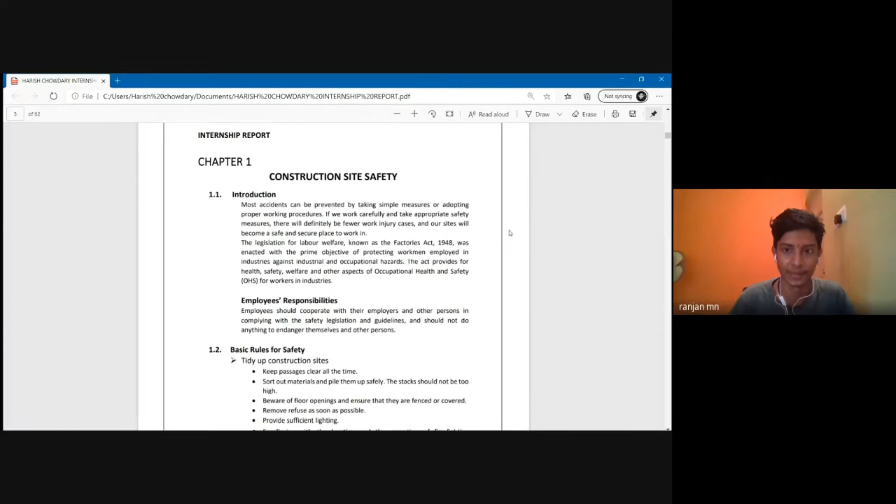Hello? Yeah, Harish, fine. The basic rules of safety, as we all know, are keeping the passages clean - maintaining cleanliness is next to godliness. We need to maintain a clean atmosphere where we work, whether it's poisonous gas emission from industry or anything of that sort, or wearing precautionary safety helmets. These safety measures are to be taken compulsorily.

Moving on to safety measures before operating a machine: ensure that the dangerous part of the machine has been installed with a guard. This is very necessary because we'll be working with hazardous material like drilling machines. Pointy equipment has to be safeguarded with caps.

For example, the reinforcement at the bottom of the foundation will be left open. So we'll have to make sure a cap is installed, because if the employee working there falls on it, it may be life-threatening for him. We'll have to make sure safety precautionary caps are installed on pointy equipment or anything of that sort.

Harish, next please. So what about personal safety? I just talked about the safety measures for the equipment we're using. Equipment aside, we'll have to make sure we ourselves are safe first. So what safety equipment do we need to make sure we're using is the first thing that comes to picture.

Wearing protective equipment - the PPE, that is the protective kit we're using - it may be gloves or helmet, anything of that sort. Shoes are mandatory because we'll be working with heavyweight materials and pointy equipment also. Shoes and helmets are compulsory items we must be equipped with.

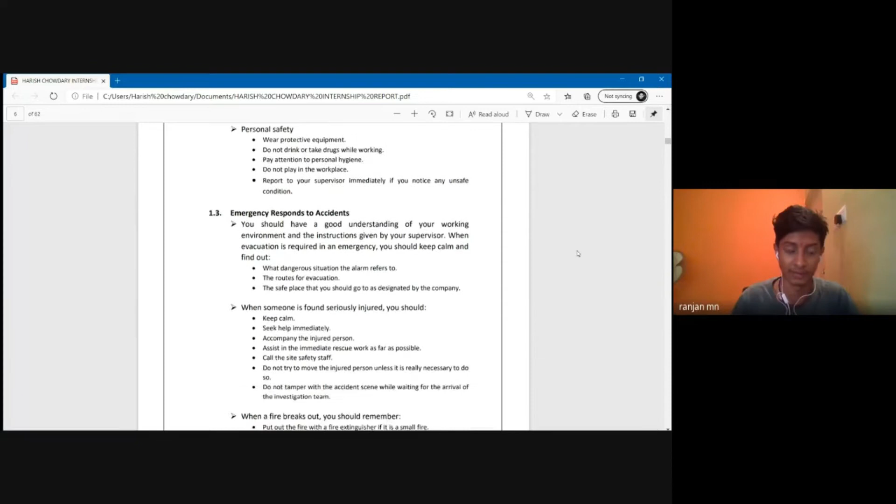Yeah, Harish. These are some of the tips for workplace safety.

Coming on to falsework, we'll have to make sure that during false work, there are many hazardous conditions happening. We'll have to check whether the false work is erected according to the design. Make sure that the false work is securely erected. If it's not securely erected, it may cause danger to us also.

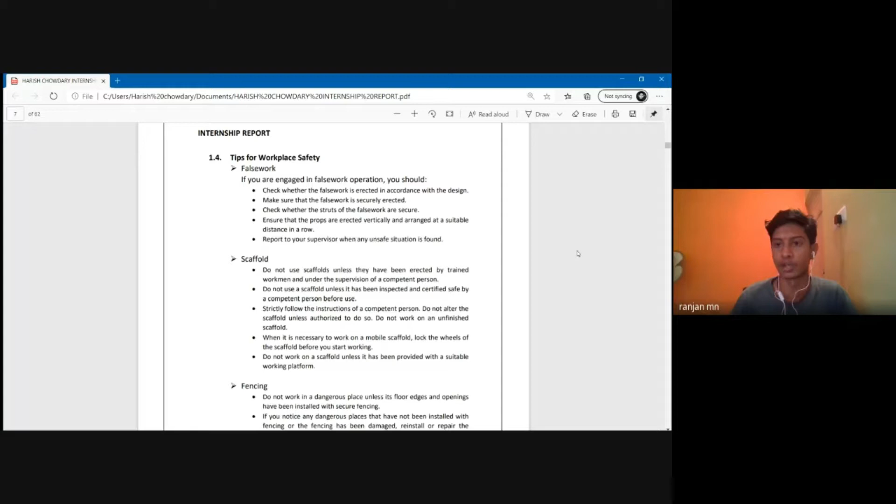Coming on to scaffolding works, we know that there are many types of scaffolding. There is automatic scaffolding also with wheels. We have to make sure that scaffolding is fixed by an engineer who has sufficient experience in scaffolding formation. If the scaffolding is not fixed appropriately or the joints are loose, the person working on the scaffolding may risk his life. And if the wheels are not locked during the scaffolding, it may slip and cause various damages to the worker also.

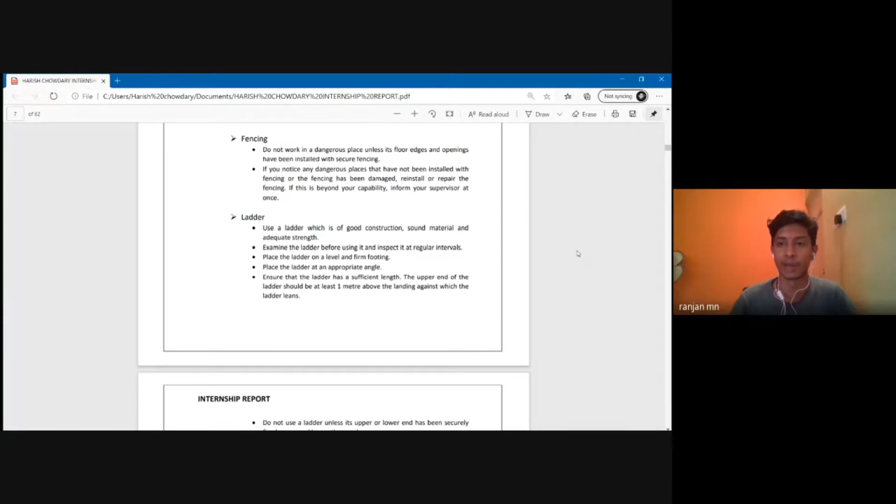Fencing and laddering, as we all know, dangerous places like floor edges or openings should be installed with secure fencing. We need to make sure that fencing is proper and the foundation of the ladder should be secure so that it does not slip or any negative activity happens over there.

As I said, this is same as workplace safety and fire protection. Excavation: during the excavation work, we'll have to make sure that the excavated earth material is moved at least 1 meter or 1.5 meters apart from the excavated place. If any excavation material is left on the edges itself, there is more possibility that the excavated earth material falls back again into the excavated place. So it's completely a waste of the work we have done if the excavated material falls down into the pit that we have excavated.

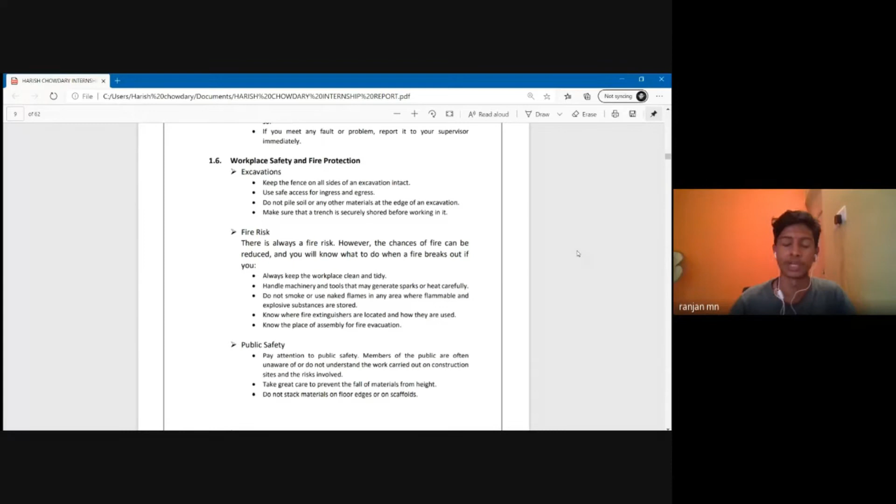Regarding the fire risk, I always say it should be clean and tidy, since fire can occur due to the fuels that we have stored and due to equipment also. We'll have to make sure that the equipment is stored in a dry and clean place so that no fire accidents may occur.

Waste disposal is the major concern we are facing these days. It may be construction waste, demolition waste, or anything for that matter. Waste disposal is causing a lot of negative activity on the atmosphere as well. The waste left as such, like construction or demolition dust waste, may get into the atmosphere and cause various respiratory problems also. So we need to make sure that this waste is disposed of properly, in a specific place far away from the city. Or if there is any chance we can use this disposed material, such as aggregates or anything for that matter, for other construction purposes, recycling of this material can also be done. So waste disposal plays a very important role in this.

As I said, personal safety hygiene, that's PPE, personal protective equipment. This is a hot trending topic these days after the corona outbreak. Especially all of you would have heard what PPE actually is. It's personal protective equipment, just to protect ourselves.

You are observing in this corona situation what's happening, they're completely covering their body. The reason for completely covering their body, especially their nose and mouth, is that there are more chances of the virus spreading through the nose and mouth. Taking that same example in the construction field also, we are getting more affected through our hands, our head, or also through our ears. So for that matter, we'll have to make sure we are completely equipped with safety equipment so that we are safe.

Eye protection is one of the major causes. While you are working on electrical conduits or anything for that matter, while soldering, we'll have to make sure our eyes are completely protected. We'll have to make sure we wear safety glasses for that work.

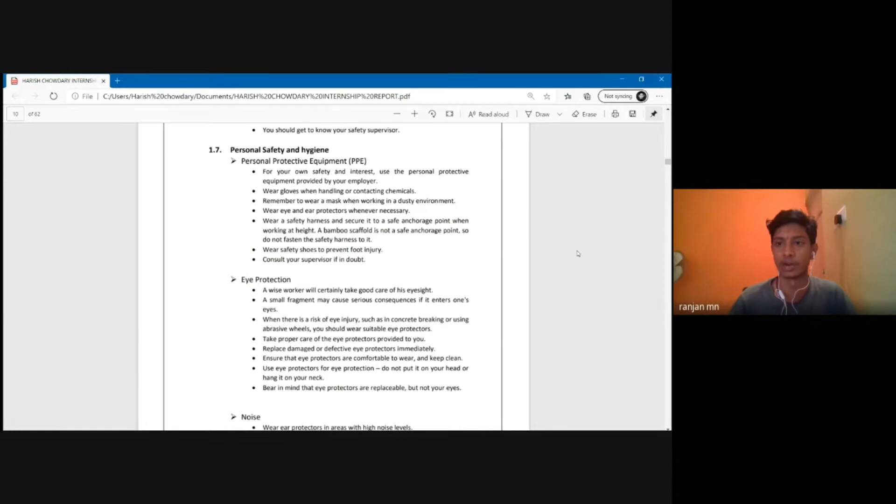For noise, especially during drilling works, excavation works, and cutting and drilling works, the noise is very much there. There are chances our ears get damaged, and we need to make sure our ears are protected. We need to use ear protectors.

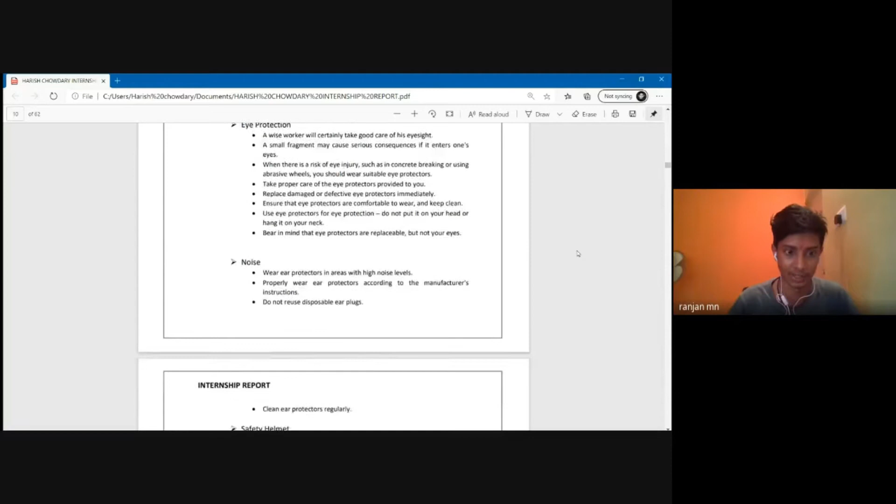Alcohol and first aid. First aid, as I said, they will have to maintain everything at the site. If any employee undergoes a sudden unexpected accident, we'll have to make sure the first aid kit is there under the supervision of the engineer.

Manual handling of the operation should be avoided, because manually there are many chances that humans make errors. So we should reduce the manual handling of operations.

Alcohol and drugs is one of the major concerns that we are facing these days. If an employee is consuming alcohol and drugs and comes to work, he'll not be aware of what he's doing or what activities he's carrying out. So we'll have to make sure that alcohol and drug use is reduced.

Personal hygiene, I don't think I'll have to talk about it much, because as engineers we'll have to make sure that we are clean, our dress is tidy, and the shoes are a must.

Yeah, from here Harish will continue.

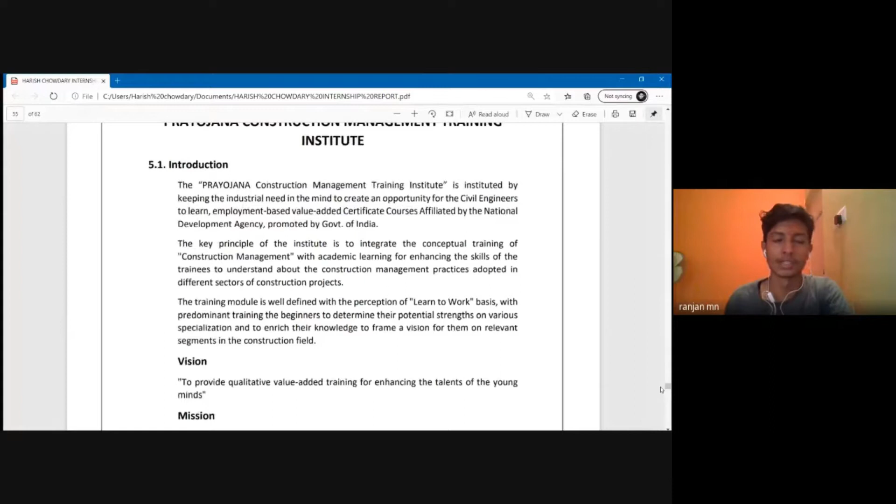As I said earlier, the introduction and mission of Prayojana was already stated previously. The vision of Prayojana Institute was to provide qualitative, value-added training for enhancing the talents of young minds. The mission was to enrich the learning modalities, that is, to bridge the gap between industry and students.

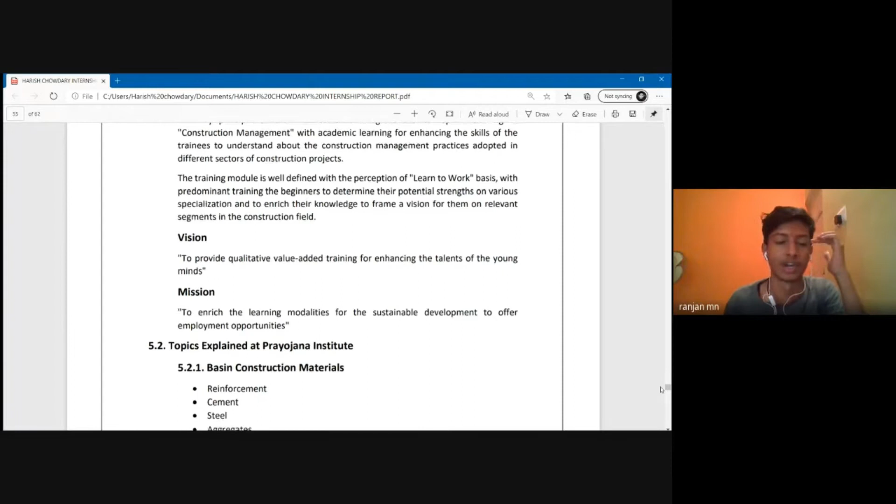What we are facing is that the academic things we learn are not at all sufficient for the industry. That was the first thing I realized.

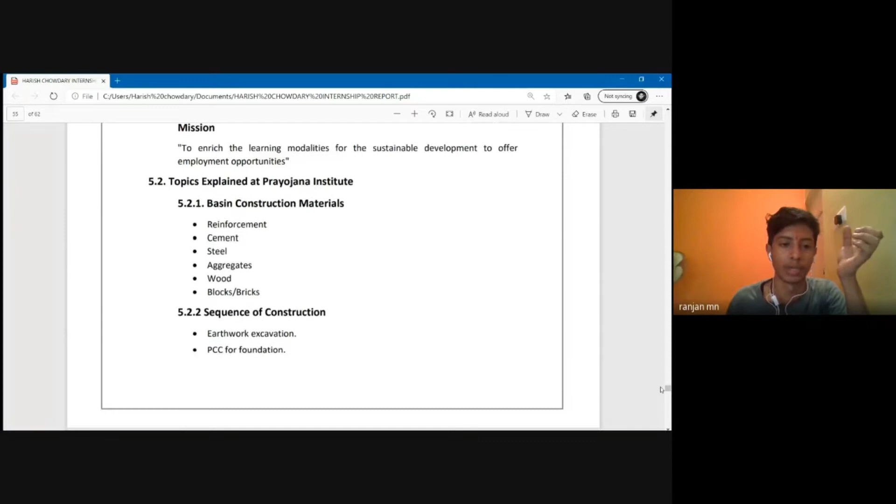Moving on to the next part, the topics explained at Prayojana Institute were basic construction materials. These are very basic components used in construction: reinforcement, cement, steel, aggregates, wood, and blocks or bricks. You all know this, so I don't need to explain it again.

The sequence of construction is very much important. Earthwork excavation - prior to this, we undergo surveying of the work. We fix different levels, using total station or auto level, or anything for that matter. We fix the levels first.

We need to level the land as per our plan, so what excavation and what filling work has to be done is calculated first. That is earthwork excavation.

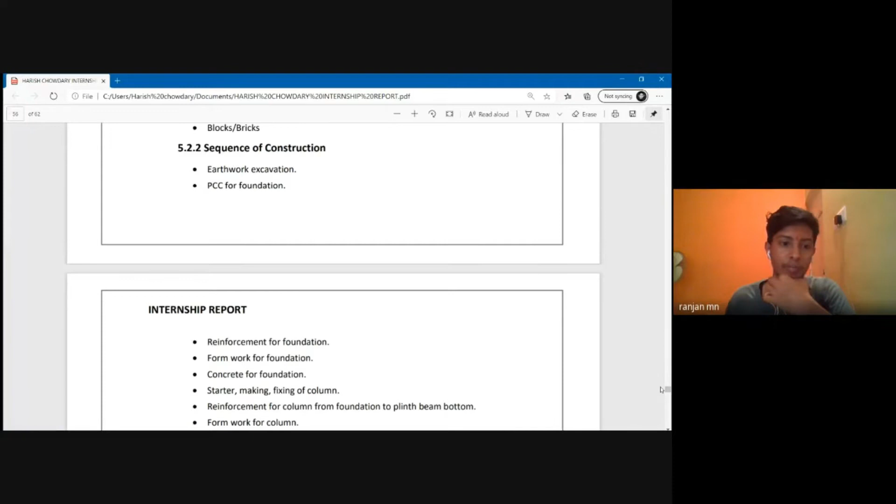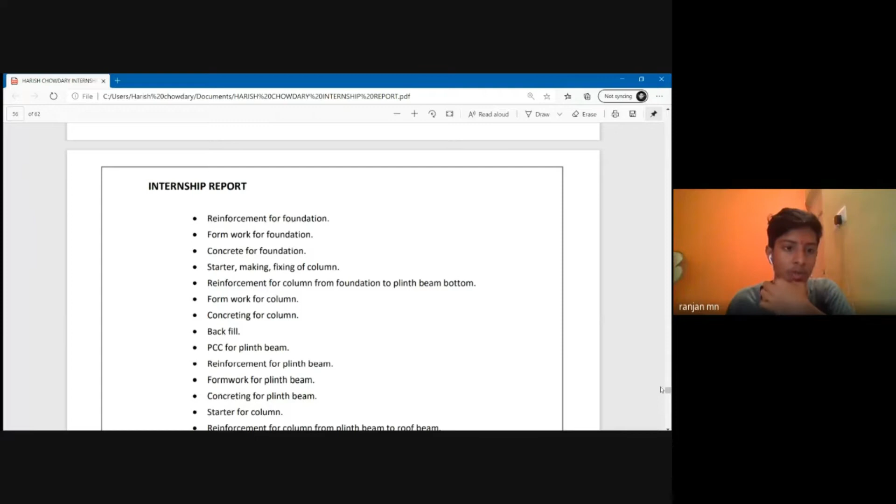PCC for the foundation has to be laid so water penetration can be checked. Reinforcement for the foundation, formwork for the foundation, concrete work for the foundation, starter making, fixing of the column, reinforcement of column, foundation, plinth beam bottom, formwork for the column, concreting of the column, backfill - these are the various activities carried out in a construction project. This was previously explained by Nikhil, so I'll move further.

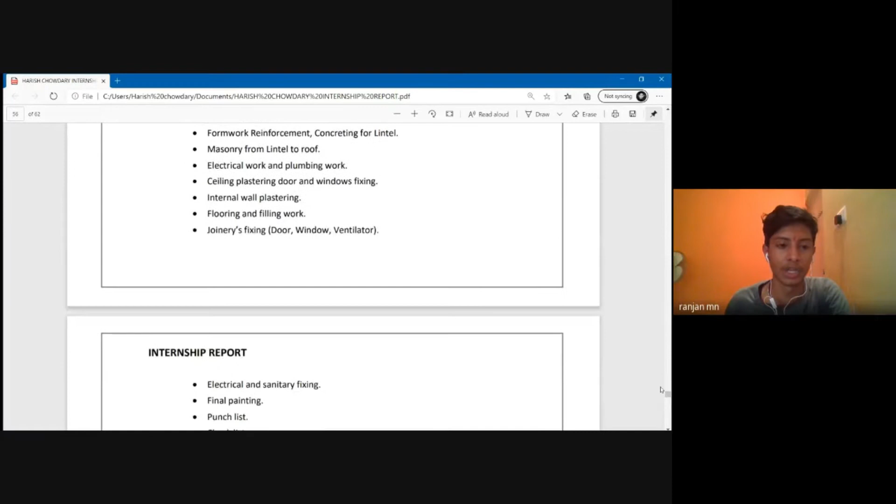As you can see these days, building collapses are happening frequently in Bangalore. Recently, beside the Kapali Theatre, two buildings also collapsed. The reason behind this is still being investigated - they are still searching for the reason, but I think the quality of materials or the execution of the work may not have been up to the mark.

So the test on aggregate - as we all know, there are two types: coarse aggregate and fine aggregate. What are the tests we do on coarse aggregate? These are very basic concepts like impact test, flakiness test, specific gravity, and sieve analysis. And for fine aggregate also, we test for sieve analysis, specific gravity, and silt test.

So, test on steel. The reason why we use steel in concrete is well known to all - concrete is very strong in compression, whereas steel is very strong in tension. To balance this, we go for reinforced concrete, where steel and concrete are used together.

So what are the main components of steel testing? What are the tests we do? There's the tensile test, impact test, compression test, and bending test. So what are the tests on cement?

Cement plays a very major role in compression. Consistency of the cement may be for the matter of color or anything else. The initial setting time of the cement may be up to 30 minutes, the final setting time up to 10 hours, and there's also the specific gravity of the cement.

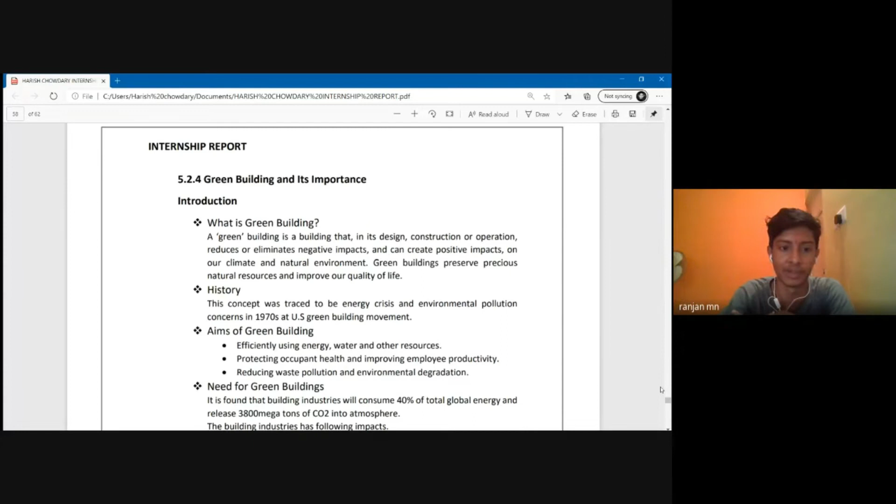Coming to green building, normal construction buildings using normal aggregates and normal cement consume 40% of total global energy, and release 3,800 megatons of carbon dioxide into the atmosphere. As I said, the building breathes. Once we go with concrete, the building also breathes and releases carbon dioxide into the atmosphere. Just imagine, 40% of global energy is being consumed, whether electrical energy or material energy used in processing, for anything for that matter. But 3,800 megatons of carbon dioxide being released into the atmosphere is simply not acceptable, I think.

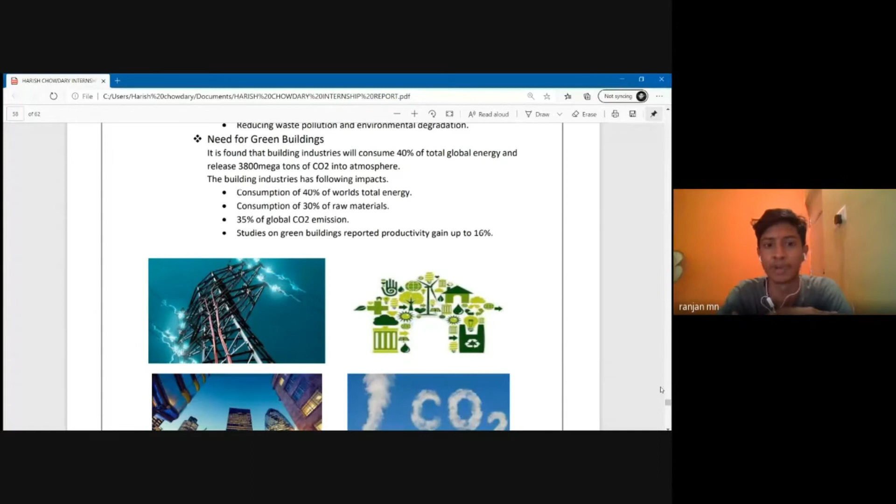So the building industry has the following impacts. Normal buildings consume 40% of the world's total energy and 30% of raw materials. As you know, in buildings we use natural materials only - coarse aggregate from stone and rocks, fine aggregate from sand beds, and cement, which undergoes many chemical reactions and processes in its production.

So 30% of the world's total raw materials is used in the construction field only. 35% of global carbon dioxide emissions are due to the construction industry, whether from equipment like cranes or other things, and due to the high use of cement.

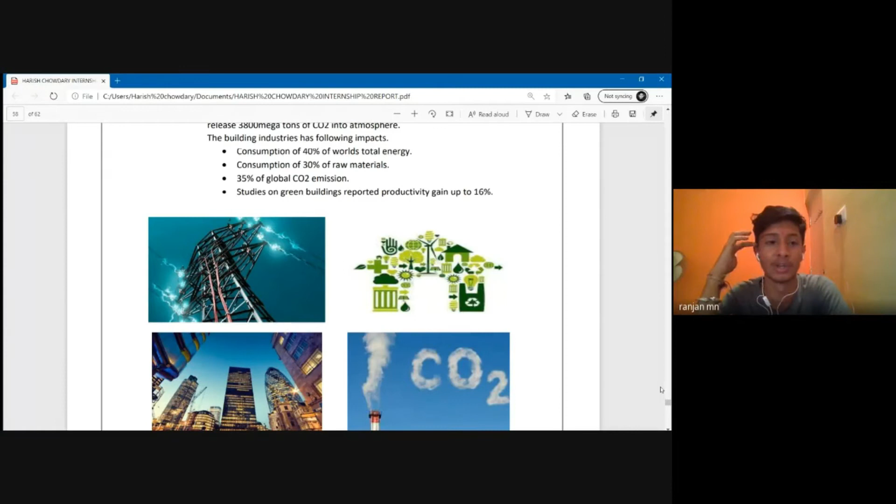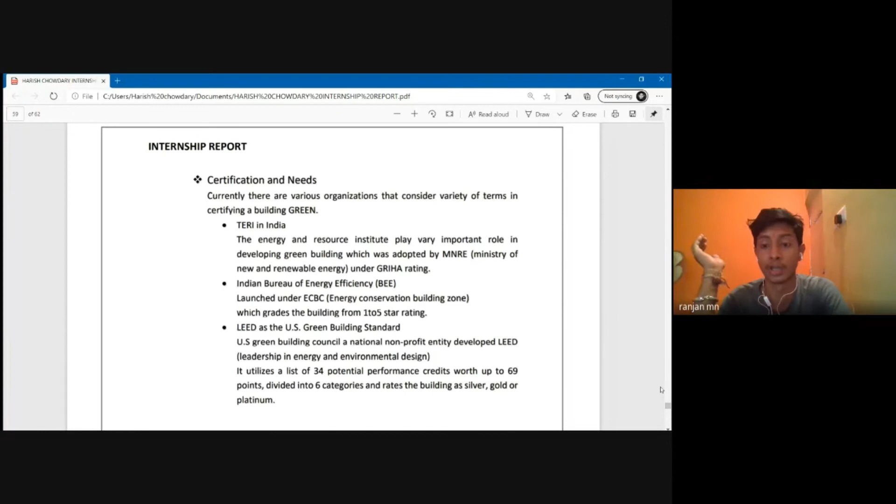So what certification do we need for green building? Just imagine you are the customer, thinking 'yeah, this is my green building.' You go to some normal client and a normal mason builds your building, and while certifying it you just say 'yeah, this is my green building' - that cannot be accepted by the company. So what terms and conditions we need for green building is the major concern.

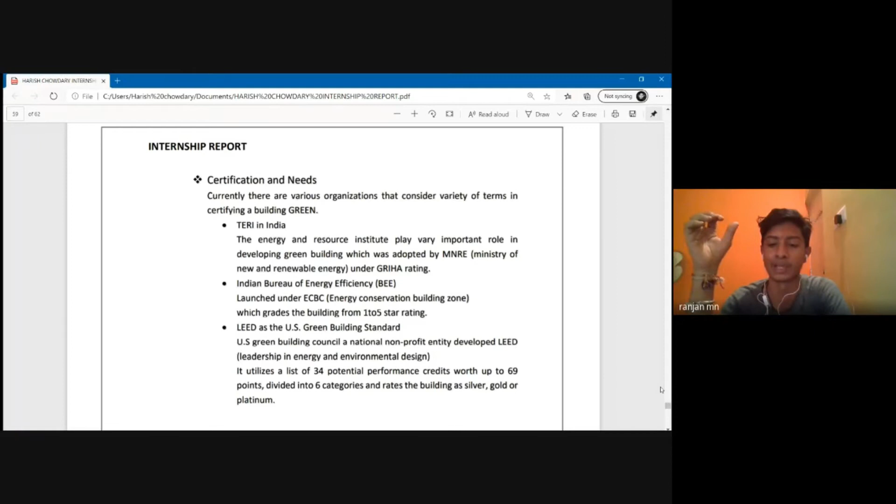TERI India under the Ministry of New and Renewable Energy Resources gives the GRIHA rating certification to green buildings. There's also BEE, the Bureau of Energy Efficiency - most of you would have observed 5-star ratings on electrical appliances like fridges or ACs. The first thing you ask is the rating, because equipment with 5-star ratings has less energy consumption.

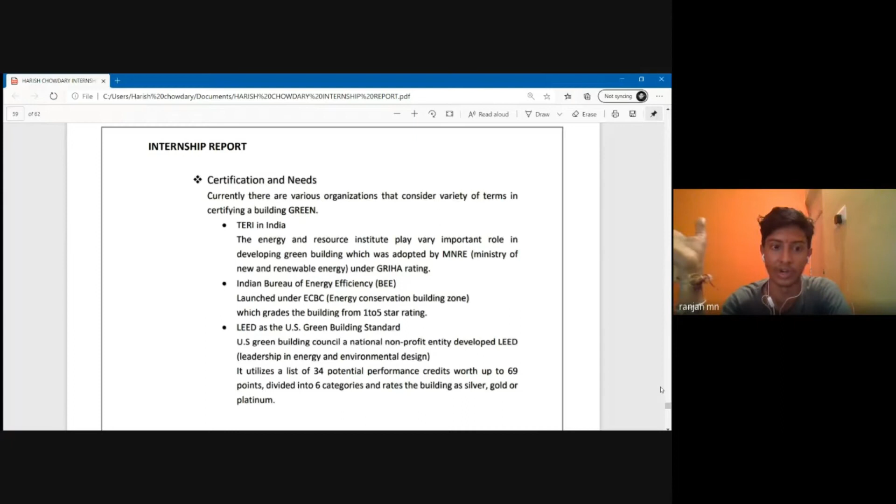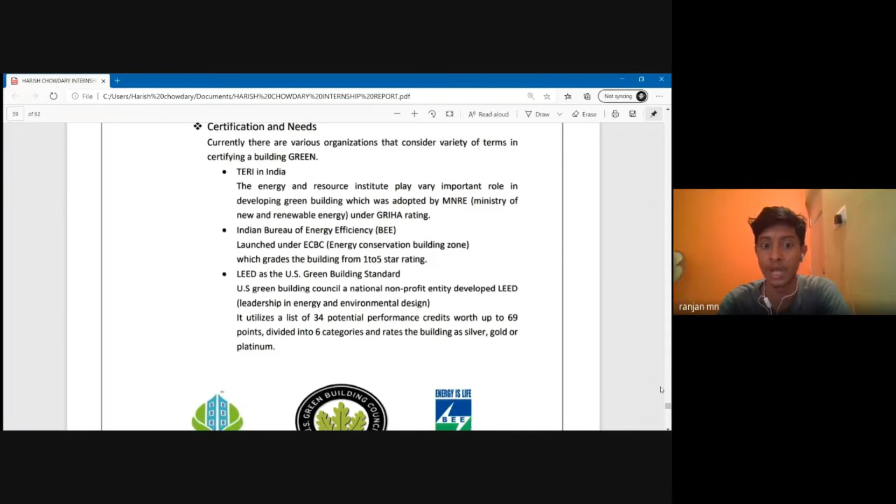LEED stands for Leadership in Energy and Environmental Design. As the name suggests, it should be less energy consumable, and the design should be environmental and eco-friendly. This is the US Green Building Standard. It utilizes 69 points divided into 6 major categories, and ratings given for a building may be silver, gold, platinum, or similar. There are 6 categories majorly considered by the Green Building Council.

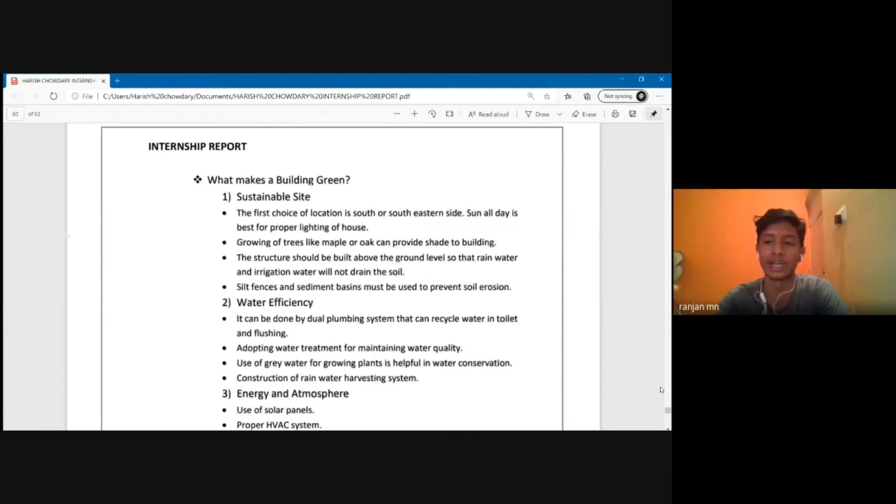Going on to the 6 major criteria that IGBC looks for to rate your building: the first is sustainable sites. The selection of site, the direction of site, or the construction orientation plays a very important role. South or southeastern side of the construction site is preferred because sunlight throughout the day provides much higher light in the building, and energy consumption is reduced.

You can go with solar panels or similar measures for that matter. Energy consumption is much less when you take a sustainable site, and the site should be above ground level. If it's below ground level, we do filling activities to raise it above ground level, ensuring drain water doesn't enter the building - because if drain water enters the building, you know the ill effects that happen.

It may lead to health issues, even degradation of the quality of the building. There are many issues that can happen, so the selection of the site is very important. Out of 6 criteria, this is the first one: the sustainable site.

Water efficiency, whether grey water or black water, is very much required. We cannot simply let water waste go into the drains. So what is water efficiency?

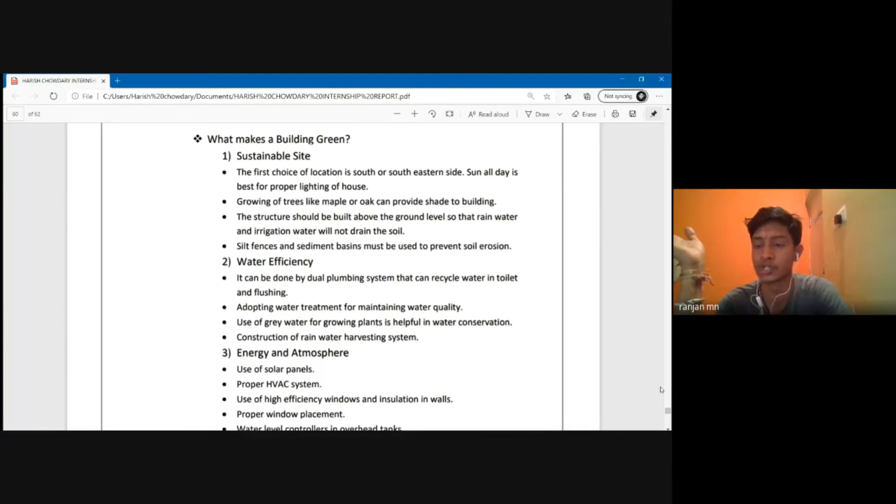Dual plumbing system is very much trending. As you all know, in Bangalore it has been made mandatory that every construction activity should adopt a dual plumbing system, along with water treatment for maintaining water quality.

A water treatment plant should be there so that the drinking water you are having is of better quality. You will need water treatment quality, and water recycling plants are also suggested so you can recycle the water. Water efficiency plays a very important role in this.

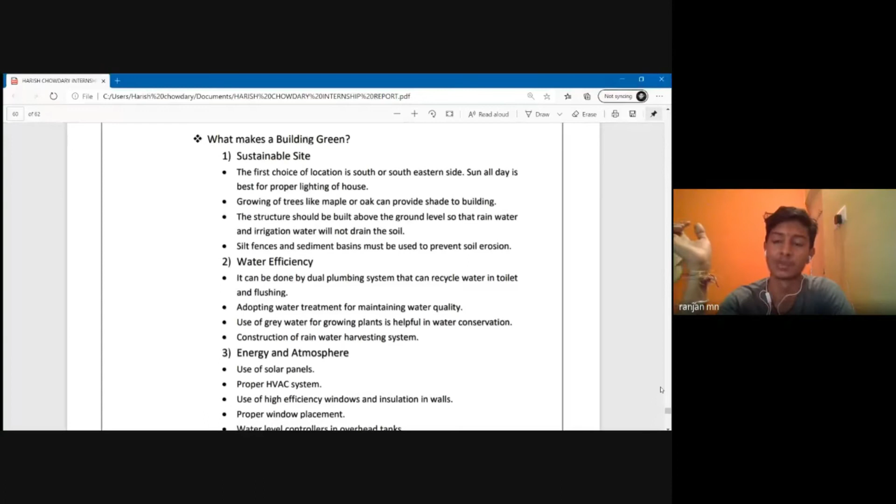Construction of rainwater harvesting systems is also important. There are many sorts of rainwater harvesting systems you can go for. Even a simple rainwater system is seen in villages these days, showing the need for saving water. This is the second point the IGBC considers out of the 6 points while giving you the rating.

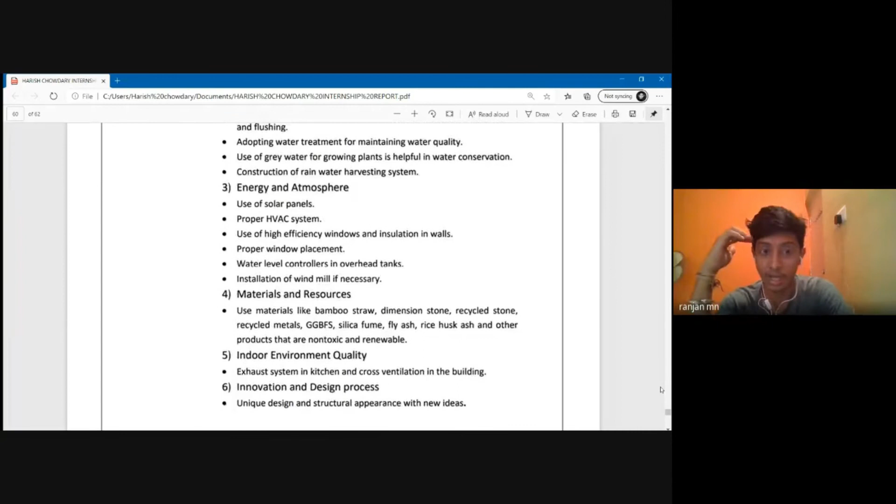Energy and atmosphere. Coming to energy consumption, in manual construction we are not going for solar water heaters; everyone is going for geysers or something. The proper HVAC ventilation is not being done properly, and this leads to various energy consumption on a large scale.

So what happens in green building is solar panels will be used, a proper HVAC system will be used, and high efficiency windows, meaning large windows can be preferred, because large windows mean large air and large light will be getting in, and we can utilize it 100%. So these are the energy and atmosphere criteria.

Material and resources. As I said, with conventional materials like cement, if you are going 100% cement, we know carbon dioxide emission is much more. If you are going 100% normal aggregates, we are consuming more energy.

What's happening in material and resources these days is instead of steel, we are even going for bamboo reinforcement, not completely but partially bamboo can also be replaced. We can use many materials like fly ash, rice husk ash, GGBFS, that is ground granulated blast furnace slag, as a substitute in place of cement.

Not completely, but if we are substituting at least 2 to 3% of these materials instead of 100% cement, we are reducing energy consumption to a great extent when it moves to a higher scale. So material and resources plays a very important role.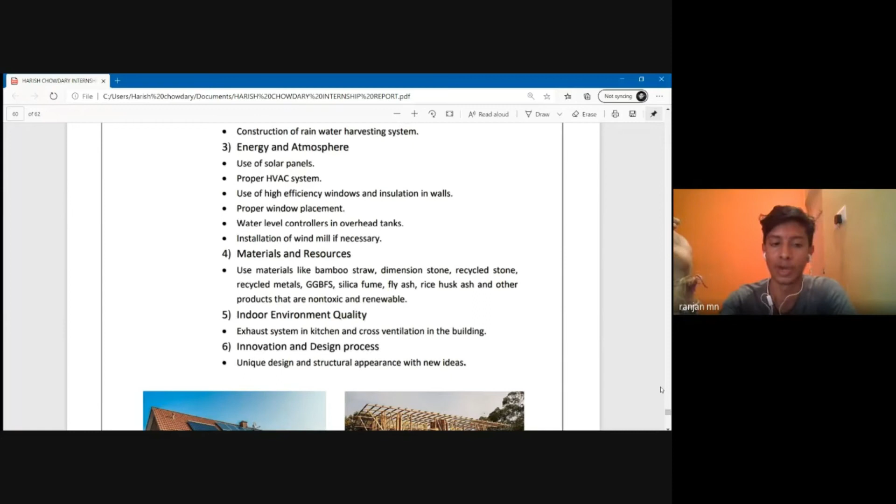Indoor environmental quality, as I said, involves the exhaust system in the kitchen and cross ventilation in the building. They mention the kitchen because it's the place of high risk for fire accidents, or smoke, which happens mainly in the kitchen. So the exhaust system in the kitchen must be very good.

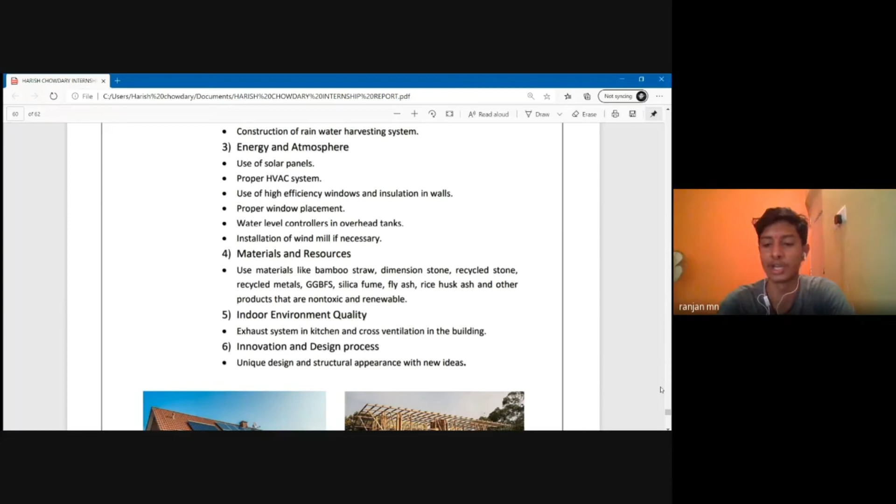Innovation in design. Green building also gives preference to innovation in design; the design should be pleasing in appearance, and they consider that too. These are the major 6 criteria that IGBC considers to rate your building from normal to platinum, as I said earlier, so make sure these 6 criteria are met.

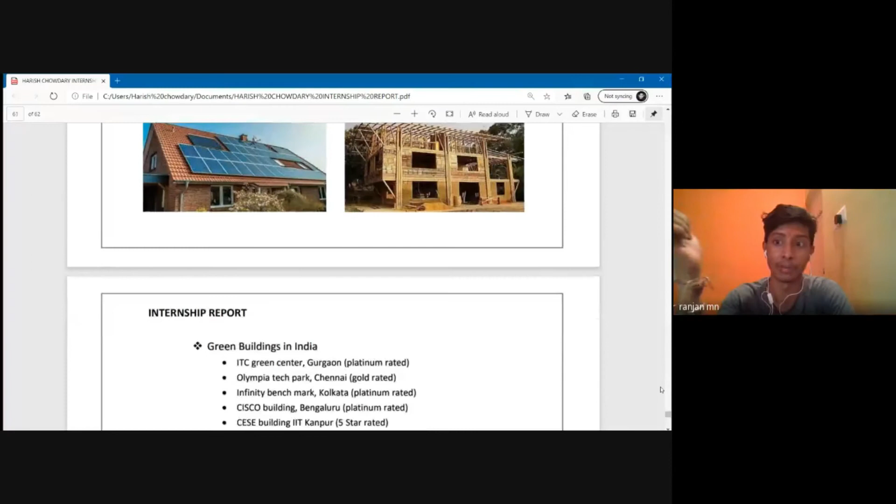During site construction, if you find any rock on the site, don't dispose of it or throw it away. You have to make sure that rock is used for some decorative purpose. If you use it decoratively, IGBC considers that you're not degrading natural resources and are utilizing them properly.

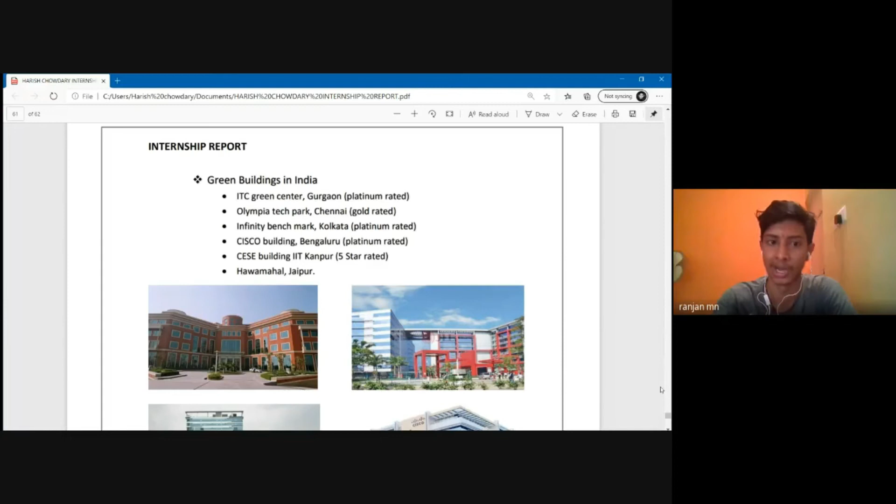So these are some of the green buildings that are in India currently, such as the ITC Green Center in Gurgaon, which is platinum rated. You can see in brackets what ratings have been given by the IGBC to these buildings.

Olympia Tech Park in Chennai, Infinity Benchmark Kolkata, Cisco building, CESE building, Hawa Mahal in Jaipur.

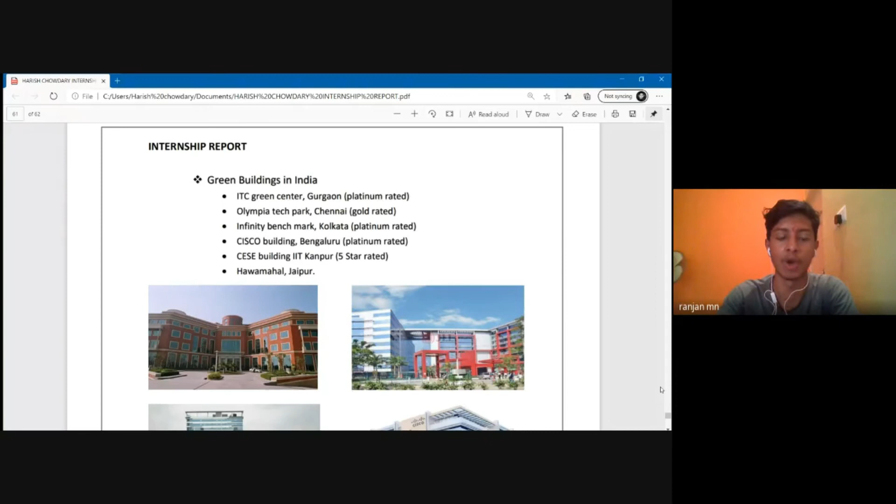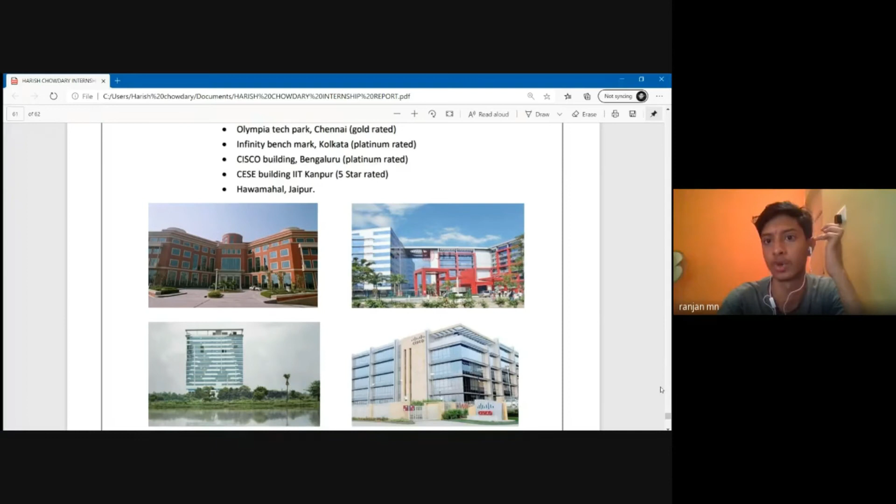I suggest everyone visit Bagmane Research Triangle in Bangalore. It's one of the platinum rated buildings in Bangalore, and I had an opportunity through Ashok sir to visit that building. It was a great experience.

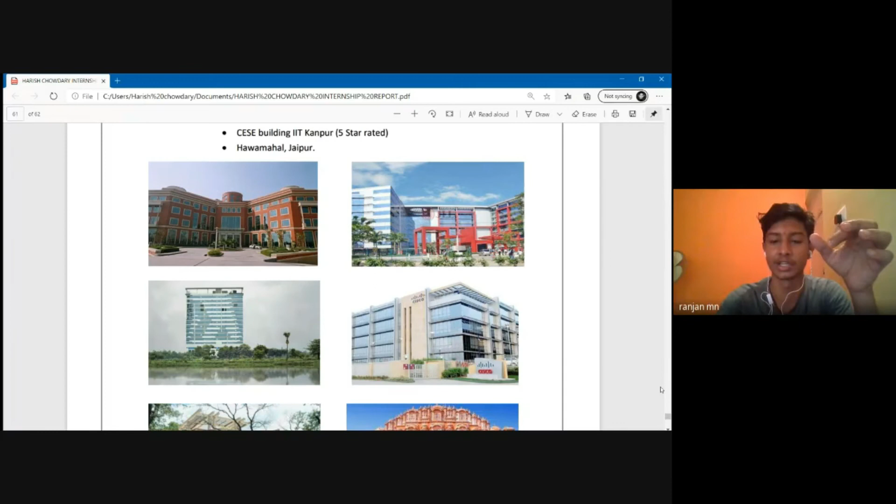The type of systems they use, from the water system to the water purification system to fire accident reduction system, everything is up to date. So I think everyone should visit Bagmane Research Triangle, you'll get a very brief idea of what green building is and what things are happening there.

You'll get a very brief idea. You'll also have guides over there, and they'll explain very clearly the 6 points that have to be met for a building to be rated green.

So what are the advantages of green building? Before going into advantages, I'd like to explain the beliefs people have. As I said, when people think of green building, going with solar panels, investing more, they think the building must be above ground level or something like that.

What strikes in people's minds is that construction cost must be more. That's the major reason. What they think is the cost of green building will be more, so they avoid it. But they don't think about their own health or the impact they're giving to the environment.

So what are the advantages of green building, and what are the disbeliefs people have? I'll explain. An upfront investment of 2% of total cost gives a life-saving of 10 times the investment.

As I said, if the cost of your project is 100 crore, and you invest 102 crore for the sake of green building, you're spending 2 crore extra—that's 2% of total construction. By the end of the payback period, you'll receive 10 times the investment, that's 20 crore received as payback.

It may be due to reduction in the electricity bill, reduction in the water bill, or reduction in health issues—you won't be affected as much regarding your health. So this is the major advantage of green building.

LEED certified buildings have higher economic value by 3.5%. This is the major thing I tried to explain earlier—all buildings cannot be rated as green building. If a contractor just constructs a building and claims it's green to charge a higher cost, it won't be acceptable.

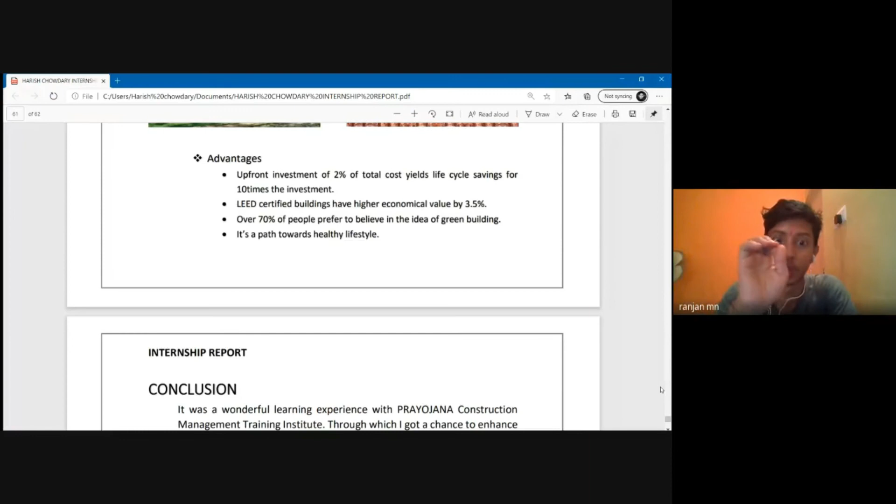LEED certified buildings have 3.5% more economic value compared to other buildings. This is the concept being developed these days, meaning people are moving towards green building. No one will simply pay 3.5% extra over normal construction practices unless they find something very important in green building—this is the major thing we need to understand.

Over 70% of people now prefer to believe in the idea of green building. As I said, earlier no one would pay that extra 3.5%—if you mentioned green building, they'd say they don't need it and would go with a normal building instead. Why should I pay 3.5%? That was the trend earlier.

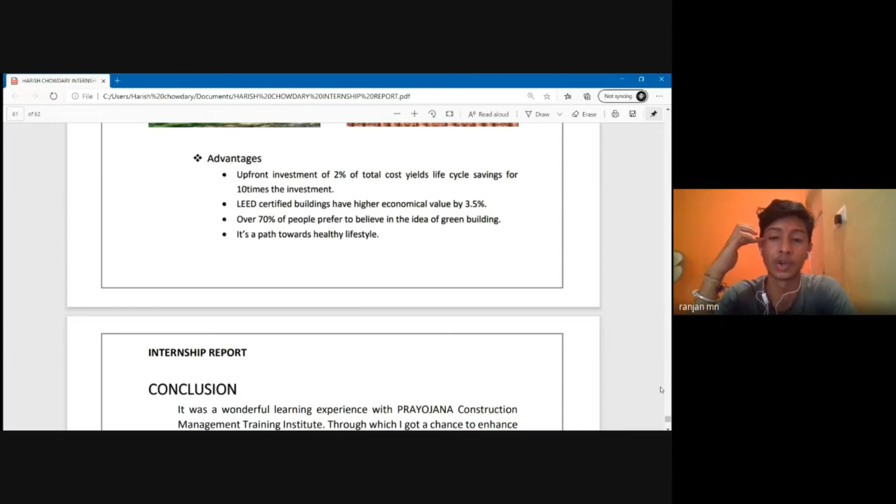But now, 70% of people believe in green building. This is because of the major health issues they're facing—it's part of a healthy lifestyle, and you may gain health benefits from it. Green building is a revolutionary concept and the current hot trending topic, and it will be cherished forever in the future.

Coming to the conclusion, as my friends and I tried to explain, even from our second year of engineering, being part of Prayojana Institute, we've been trained by Ashok sir from early days. From normal safety practices to Artha Zen sites and also to Mumbai, it was a very adventurous travel as I said, and learning about green building was an add-on for us. I'd like to give my gratitude to Ashok sir and express my wholehearted thanks to you, sir.

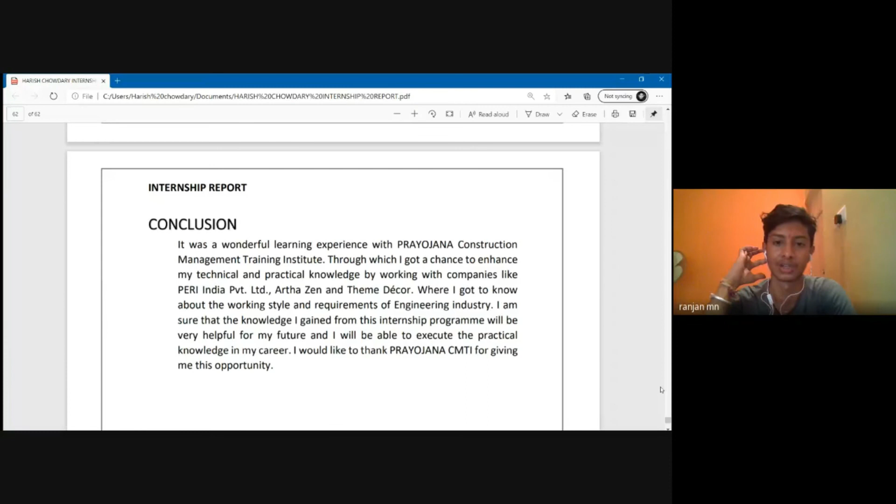Good presentation by all of you. When I was first introduced through your HOD, you were young, maybe in your second year. I still remember when I visited your college, your HOD told us, 'Sir, I am giving four boys to you, groom them well.' I hope your HOD is happy now.

I have seen all the modern technologies you learned captured in your report. I thought your presentation would be 10 or 15 minutes, but it went up to an hour, and it was detailed. You know the latest technologies very well. Even I don't know about such extensive research on PERI formwork.

Even today, Sandeep sir is very happy that you learned PERI formwork, which is a German technology, and you traveled to Mumbai without knowing the Hindi language. People say language is a barrier, but that is not true. The only thing needed is confidence. If you have confidence, you can break anything. That's what you people proved.

I still remember one guy who was supposed to travel to Mumbai with you. He was an MTech student doing structures at VIT, Vellore Institute of Technology. His parents did not allow him, saying, 'Sir, Mumbai? How will he go? He's still young,' and all that.